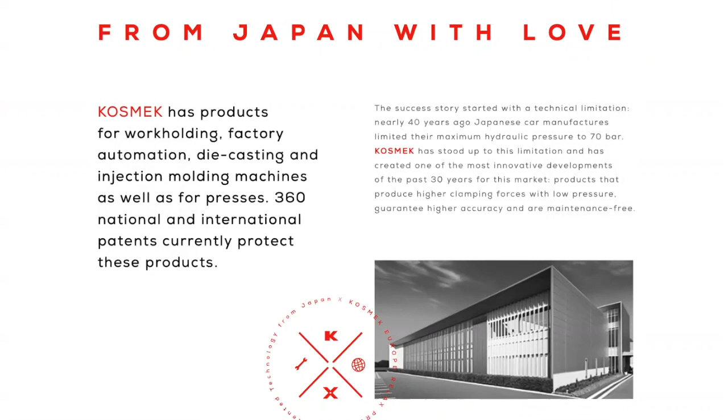Since then, KOSMEK has been the continuous market leader in Asia. Eight years ago, the increasing demand for KOSMEK's patented low-pressure technology brought the company to Europe. Today, KOSMEK is represented worldwide with subsidiaries and partners in every part of the world. Our service network works across borders to support our customers independent from their location. All over Europe, more than 20 partners are here to support and service our customers.

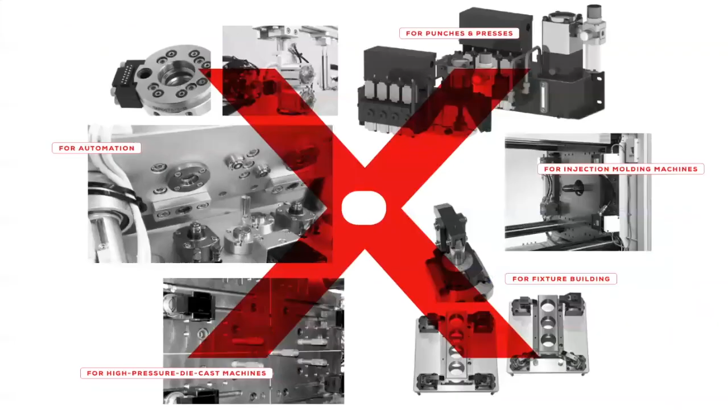KOSMEK is the only company in the world covering all areas of a workpiece production process. We offer solutions for casting, injection molding machines, and presses, like quick mold change systems, ejector rod systems, the positioning of mold and die, and the pre-rollers and die lifters for easier loading and unloading of the die.

For work holding and machining, for example, with various hydraulic and pneumatic clamps, work supports, and other positioning solutions. And in terms of factory automation, we have tool changers and grippers. For all of these business areas, the high-power mechanical lock technology is available for pneumatic and hydraulic components.

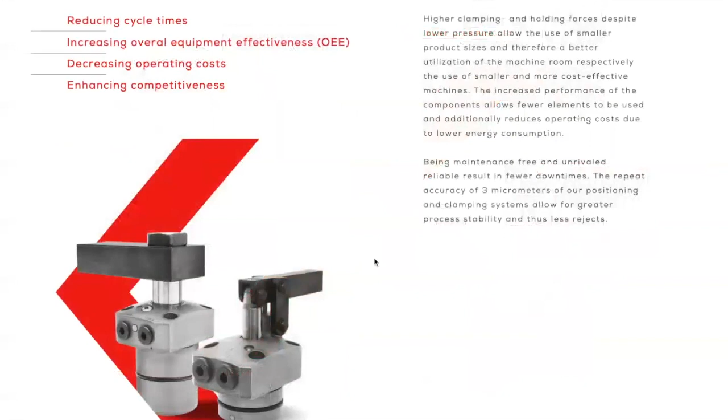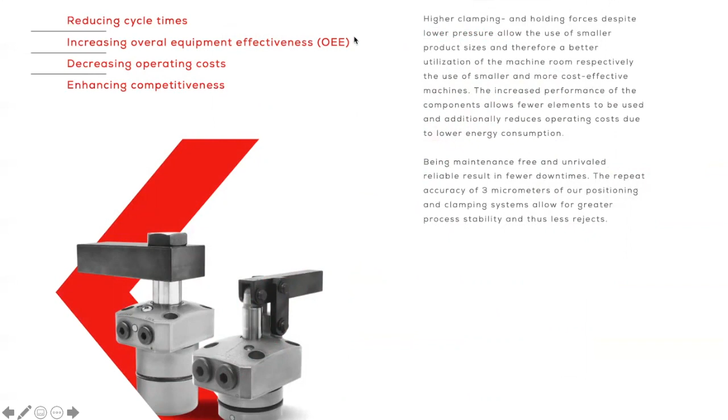In the development process of KOSMEK technologies, everything revolves around reducing cycle times to make your process faster, to increase your overall equipment effectiveness for better utilization of your machine room, to decrease operating costs, and to enhance your competitiveness as a customer.

Some of the effects of KOSMEK low-pressure technology are that you can reduce fixture costs by up to 25%. You're able to double the feed speed in the machining process and double the tool diameters as well. Therefore, you're able to achieve 4 times faster machining in this process.

Therefore, you can reduce the process steps in the whole cycle, and therefore you have fewer components on the fixture itself.

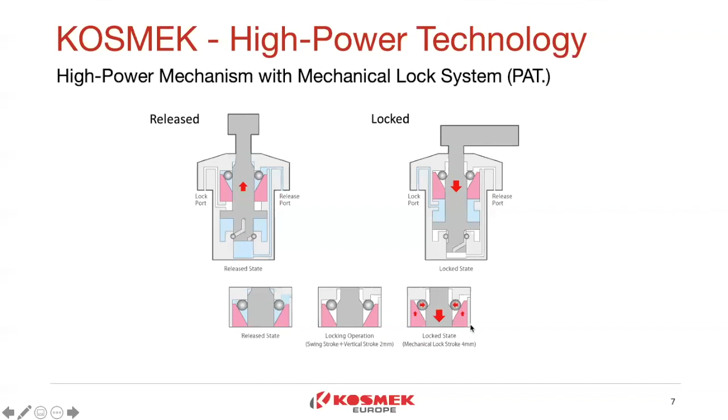From a certain point, which we call the lock stroke, the steel balls slide into the ramp, and due to the red piston, they push down the rod and increase the clamping force by up to 3 times. At the same time, the total mechanism is locked against opening from below.

When comparing standard clamping technology with high power technology, you recognize 2 main features of the high power mechanism. Due to the additional force of the steel balls to the rod, we can increase the clamping force at the same pressure, the same size of the component, by up to 3 times. For example, in pneumatic, this means increasing the clamping force from 0.36 kilonewtons up to 1.1 kilonewtons at the same footprint as the standard pneumatic clamp.

Now, what's new and unique on this type of mechanism is a so-called holding force, which is the force you need to open the clamp against the lever. Because of the mechanical lock mechanism inside, you can bring up to 7 times higher forces against the clamp than before. If you go with a standard clamp with 0.36 kilonewtons clamping force, this is also the force needed to open the clamp against the lever. Now, with the mechanical lock technology, we are able to increase this force needed to open the clamp by up to 7 times, to 2.5 kilonewtons in total.

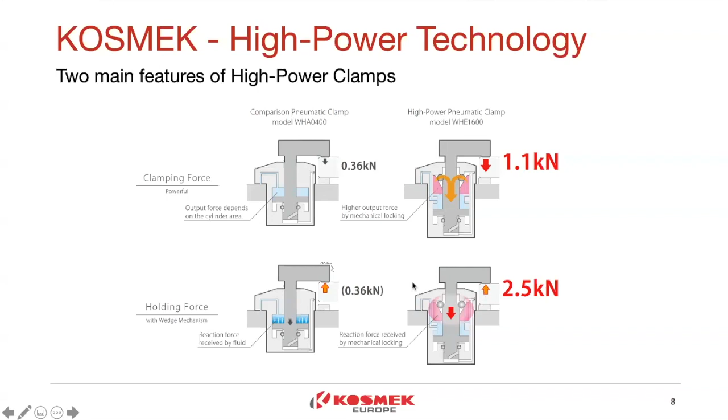Here you can see an animated cut view of a swing clamp. This mechanism works similarly in all of our other components for work holding, factory automation, and quick mold change systems. This video is just a reference of the basic mechanism itself.

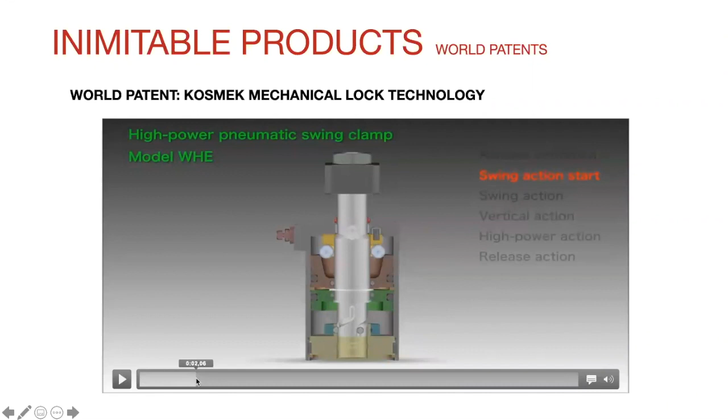The mechanism works as follows. You see the clamp right now in the released condition. When bringing pressure to the clamp, the pressure expands in between the green standard piston and the brown high power piston. When I supply pressure to the clamp, the green piston moves down and starts the swing action. Then the brown piston moves and the steel balls get pushed inside the rod, generating 3 times higher clamping forces and up to 7 times higher holding forces. Now the clamp is totally locked.

When using pneumatic clamps, you get even holding force at 0 bar when you remove the total pressure supply. For the release action, the brown piston is pushed down and the green piston moves again, so the mechanism is opened and the clamp is in released condition.

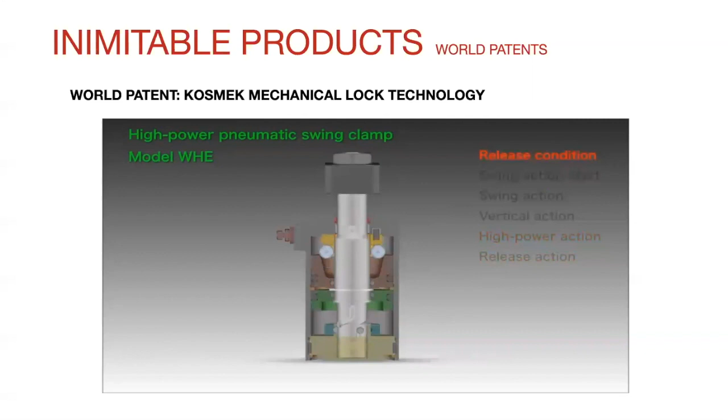So now let's have another look over the video. We are starting in the release condition. We are bringing pressure to the piston. The green piston is moving down and swinging. The brown piston is getting pushed with the balls, and we are in the high power action, and again releasing.

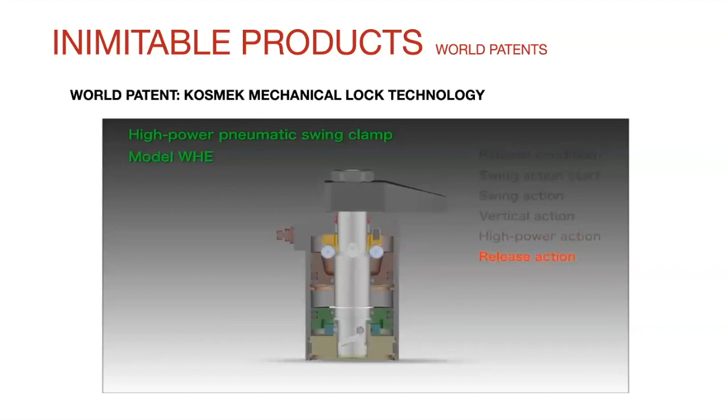So in a real life situation, this can mean the following. This is an example of a worldwide leading machine tool manufacturer. They have made a test and comparison of a KOSMEK standard hydraulic clamp versus the same clamp with the high power mechanism. The first setup was our KOSMEK hydraulic swing clamp type LHA0400 with a clamping force of 2.1 kilonewtons at a pressure of 50 bar with a lever length of 40 millimeters. The machining conditions were a tool diameter of 63 millimeters with a feeding speed of 600 millimeters per minute.

After changing the swing clamps to the same model, but including the mechanical lock, the machining conditions were as follows. We are using our KOSMEK high power hydraulic swing clamp type LHE0400 with a clamping force of 4 kilonewtons, but with an additional holding force of 6.9 kilonewtons, which is the possible force against the lever, also at 50 bar and 40 millimeters lever length.

But the main result was a doubling of the tool diameter to 125 millimeters and a doubling of the feed speed up to 1,200 millimeters per minute. In total, this means 4 times faster than before, at the same setup, the same size of clamps, and the same machining center. And I now want to show you this in a short video.

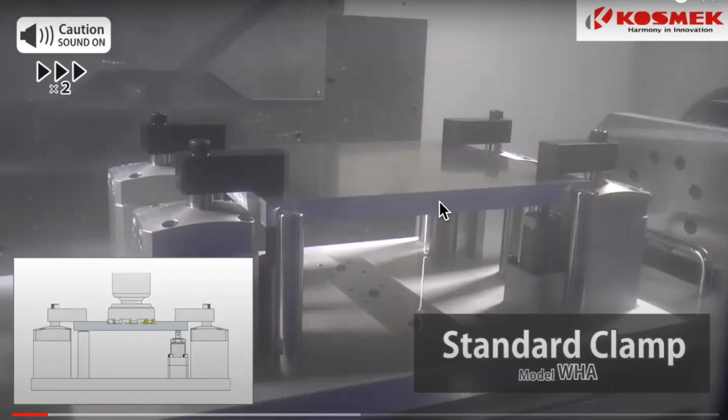So please let me share my screen now. Here you can see the same setup as shown on the slide before: a rotary table with 4 of our swing clamps and a thin workpiece which needs to be machined. The first setup again is with the standard clamps. Now I want you to listen carefully how the sound is changing when machining this workpiece.

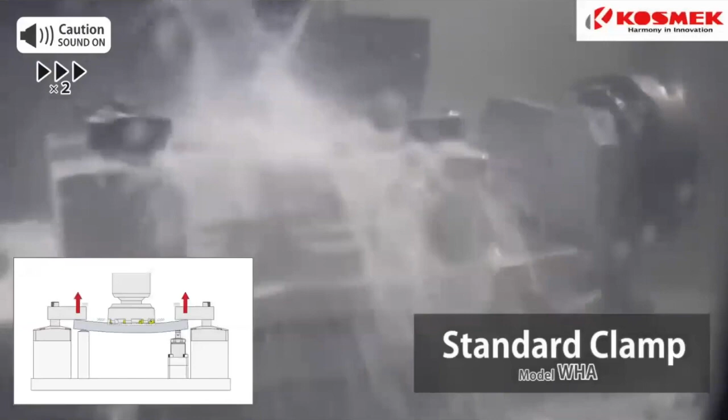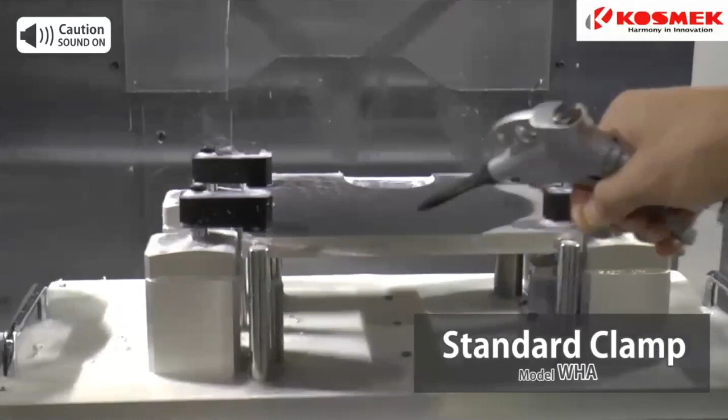As you can see, after a certain point, there are vibrations happening on the workpiece. You can hear it chattering. And as you can see here, the surface quality is not that good at all.

Now we are changing to our high power setup and are going to machine this workpiece once more. Once again, I want you to listen carefully to the difference in the sound while machining.

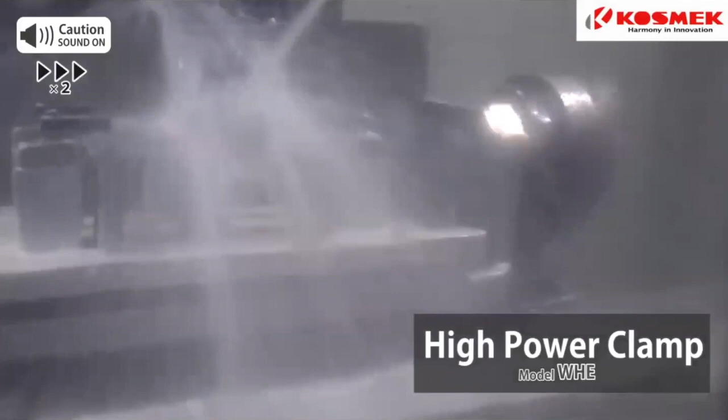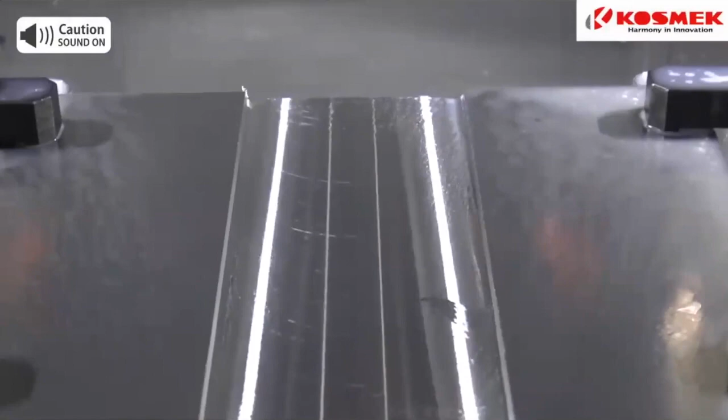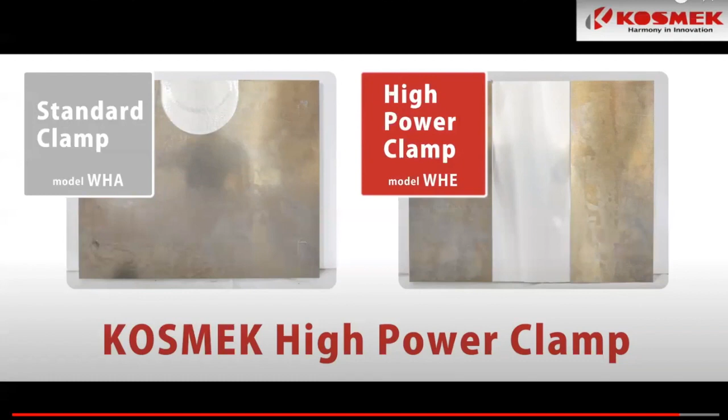So, as you can see, the quality of the surface is much better than before. And from the sound of the video, you should have noted that there's no vibrations, no chattering while machining. And therefore, that is our high power technology from our clamps. So let me resume our presentation.

Now to the main benefits of our high power technology in a nutshell. Since we are able to generate 3 times higher clamping forces and up to 7 times higher holding forces, this enables you to decrease the size of the clamps by up to 2 sizes. This enables smaller fixtures, more space in the machining rooms, or even smaller machining centers themselves. We can generate higher quality because of less vibrations, less distortion on the workpiece, and bending of the workpiece due to our mechanical lock.

You as a customer are able to use backside machining with our clamps, which is machining against the lever. This could save complete operations or create new clamping situations for machining.

And last but not least, the cost reduction point. As you all know, to produce 70 bar is much cheaper than to produce 200 bar on the machine. We can reduce the number of components on the fixture, and since we can reduce the components on the fixture, we have less fixture production costs and maintenance for you.

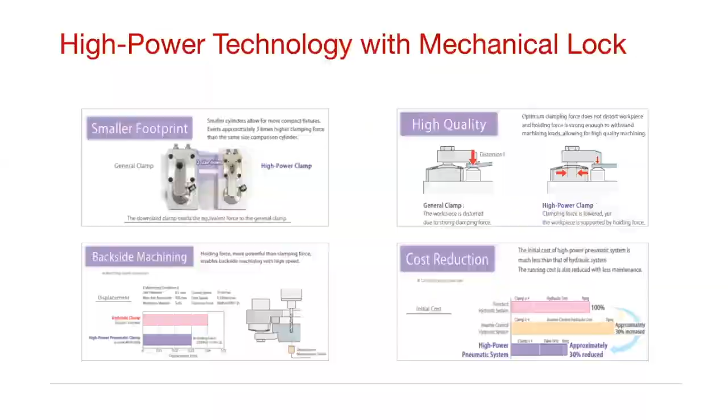To point it out again, for all these business areas - for quick molds, die change systems, work holding like clamps and work supports, and for factory automation like tool changers and grippers - this unique and worldwide patented high-power technology is available in pneumatic and hydraulic.

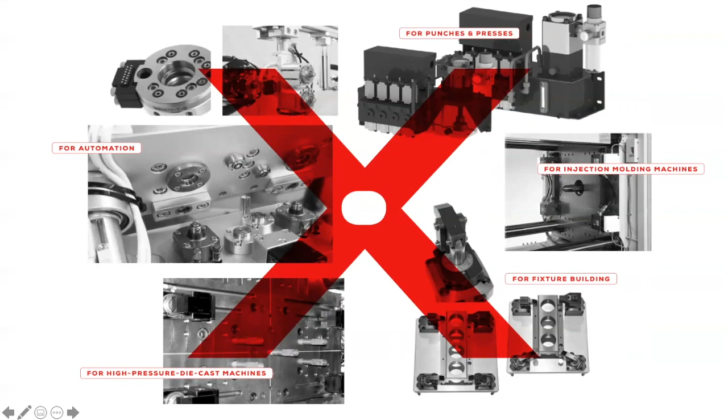Coming to one of our customers, TCG Unitech. TCG Unitech is a leading Austrian die casting company covering the complete process from aluminium casting through machining and assembling of total modules for leading premium car manufacturers. TCG is part of the international Gnutti Carlo group.

TCG Unitech now has been using KOSMEK for 3 years. They have completely switched from high pressure fixtures up to 200 bar to KOSMEK low pressure technology with mechanical lock at 70 bar. And here you see the results.

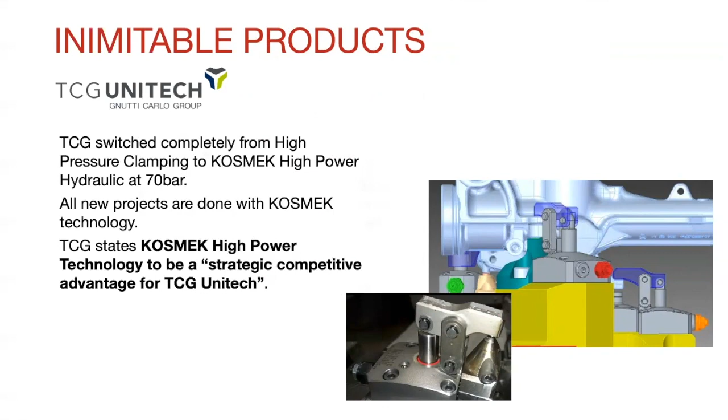TCG was able to reduce both the maintenance costs of the machining devices and also of the hydraulic systems on the machining centers with the help of the KOSMEK low pressure technology. The reason is simple: due to the lower hydraulic pressure required, the hydraulic unit, the lines and connections are significantly less stressed, and the quality of the components has remained the same in comparison to other clamping elements.

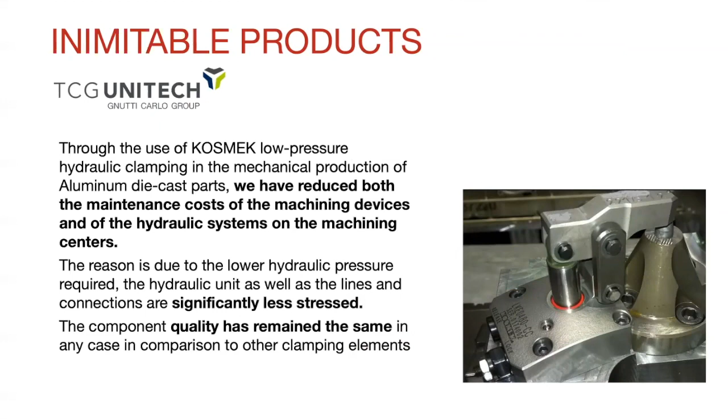The compact design of KOSMEK work holding components, which depends on the application, also allows TCG Unitech to use even smaller machining centers than before, which is also a decisive reason to use KOSMEK components or KOSMEK technology.